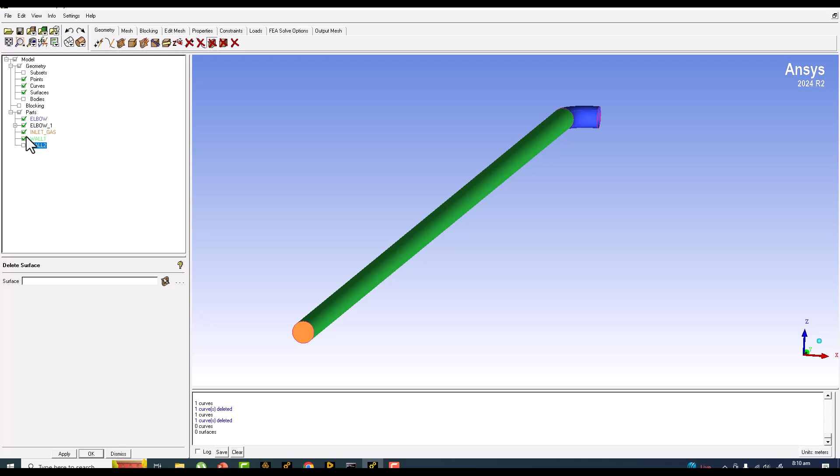We have made these parts: wall 1, wall 2 and the elbow, and also the inlet. In a similar way we should make another boundary condition, the outlet. Right click here and make it the outlet. Outlet is combined. I will tell you one more thing, that we have two inlets, and those are like air and water. I will explain that shortly.

So we have this elbow, and these are the extra circles that I required for some purpose, which I will explain shortly. So first of all, this meshing contains two parts: first is the preparation of geometry, and second is the actual blocking.

So the requirement is that if you take a look here, if I make 2 points on the circle, that is from points and parameters. So make one point here.

Let me show you one thing. First thing is that I made the center of the curve. Let me delete these points altogether. This thing will be very helpful to you. So first I made the center. You can make the center of any arc or circle.

Before I go further, the next thing is that I need to make the inlet for the gas. So first a diameter here: 0.2031, let me use the calculator... 0.2032. The requirement is that the diameter of the gas inlet should be around 35 to 40%.

So multiply with 0.35, and similarly 0.2032 multiplied with 0.4, 40%, gives 0.08. So I actually went with 0.076. Its half value would be 0.076 divided by 2, so the radius would be equal to 0.038.

So I'm going to move these points by the same distance. We have the translation tool, the transformation tool, where we also have the option of translation. So I will copy the point.

So for this point selection toolbar, I think we have disabled the point selection, so I will enable and disable the selection for surfaces and bodies. Okay, select the point, and here we have the two axes, we will move them in x and then in z. So in x it's 0.038, apply, and in z, 0.038.

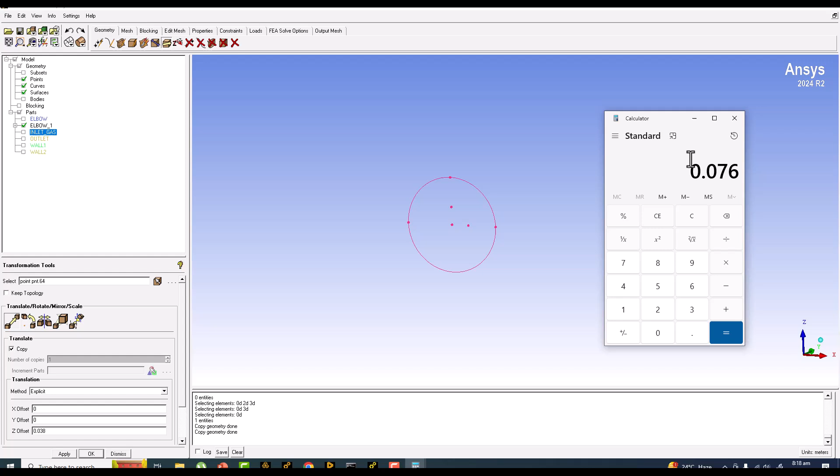Alright, so now we have the diameter equal to 0.076. Okay, so now we are going to make one circle from these 3 points.

The next thing is that I am going to make one center point at the 50% location. It's already there. Let's make it 0.25, 0.25, 0.25, 0.75, 0.75. Okay, now I am going to split the curve.

I will adopt this strategy for all the curves, because this will help me adjust the blocking very nicely. So I am going to split these curves one by one at these points, then the outer curve on all these 4 points.

So what will happen is we will now get 4 curves that you can check from the delete curve option. Don't delete it, just select - you can select 1/4 of the curve. This means we have divided or split the curve into 4 parts. But to uncheck, you have to press the right mouse button.

The right mouse button will help you uncheck, and you are not going to delete that curve. So select with the left button and then unselect with the right mouse button. That's all. So we have these 4 curves, and similarly here as well.

The next thing is I'm going to make another set of points at the 50% location - here, here, here, and here. Similarly for the outer curve, and now I'm going to delete the points there. These points I won't be needing for holding my blocking - they were only there to help us get these points.

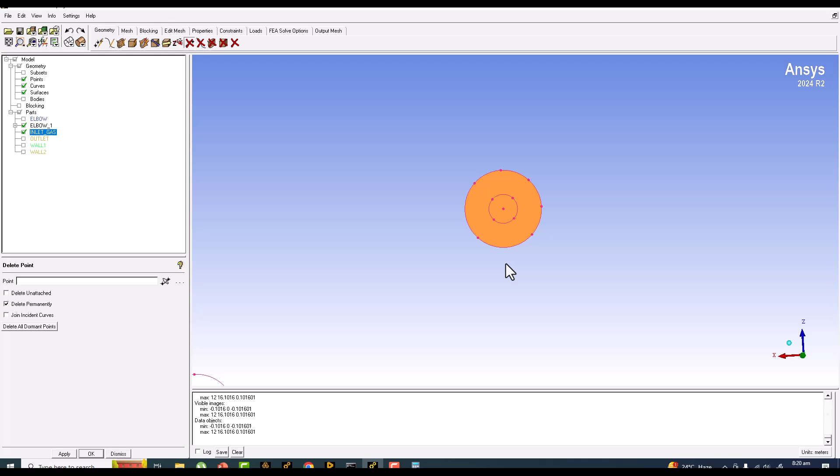Okay, we don't need the point here and here. So all of them are at the middle of each curve, right? So they are at 45 degrees - 45 degrees, then plus 90 degrees, plus 90 degrees, plus 90 degrees. So they are starting from the horizontal axis. The first point is at 45 degrees. Okay, so this is done.

The next set of points we will be creating here. One more thing - if I can copy these points, let me delete the points here, and I'm going to copy all these points. I will actually project them. So the point is we have the option 'project points to curve' - this is the curve, and these are the points.

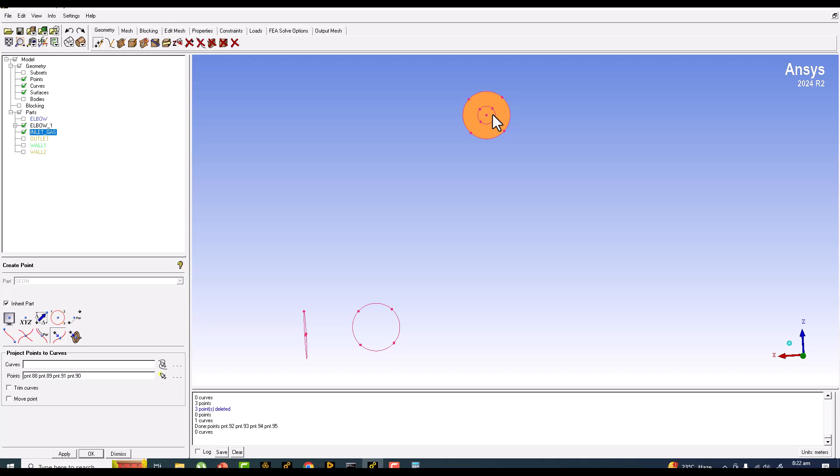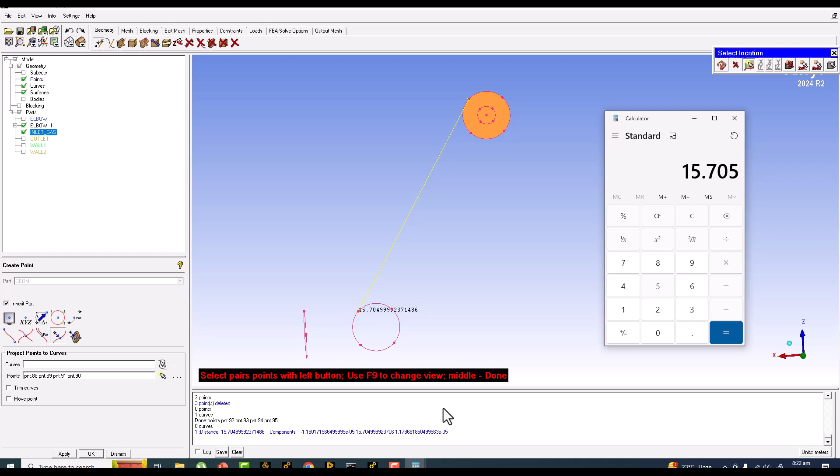But the only issue is we don't have the second curve over here, so we need to find a solution. The solution is first find the distance from the 2 points, and this is equal to 15.704 - 15.705. Okay, I would suggest we make the one curve by ourselves.

So I'm going to make a center point, and I will move that point by a distance of 0.038. This time it's going to be in the same x and z direction. So keep the z direction, put z as 0 and put x offset as 0.038 meters, and make one circle.

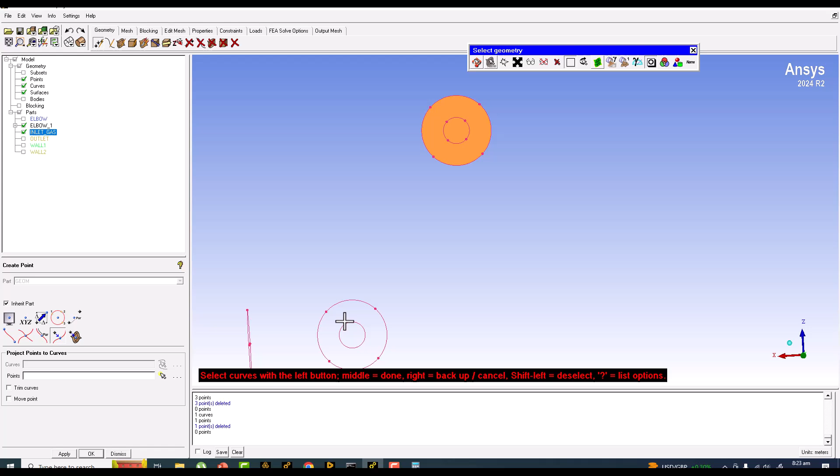Okay, I'm going to delete these points, and project the points again on the new curve, but from the previous point set, which is here. I'm going to delete the center point here. Now project these 4 points - so the curve is here, and the points are here.

Okay, so we got all these 4 points. Again, I will be doing that on this portion here. First let me deal with the first circle. So I'm going to create the points at different locations, 0.75 as well. Now make the split here.

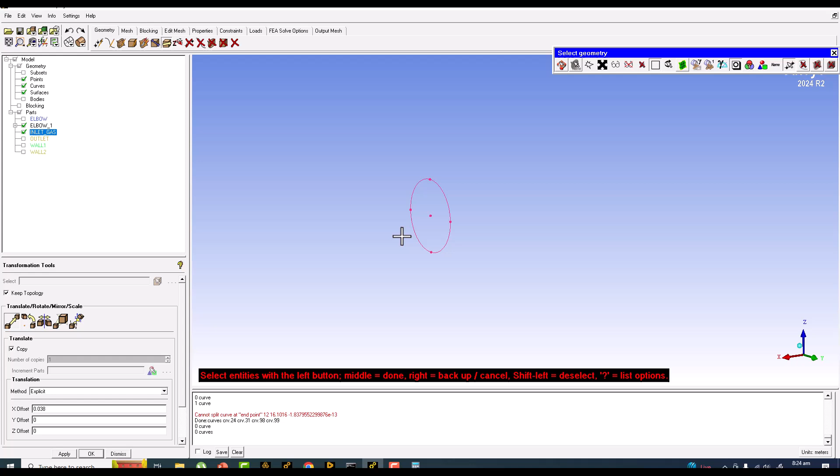So I'm going to split the curve. It's showing that we are able to split the curve. So now I'm going to move the points here, but this time in the y and z direction. I want to move it by 0.038 in y first, and then in z. Now make one circle again.

Similarly we need to make the points on this curve as well. Now split the curve on these points - segment curve, so we are talking about the second curve now, on these points. Okay, delete all these points, and now you have to make the middle location of each and every curve.

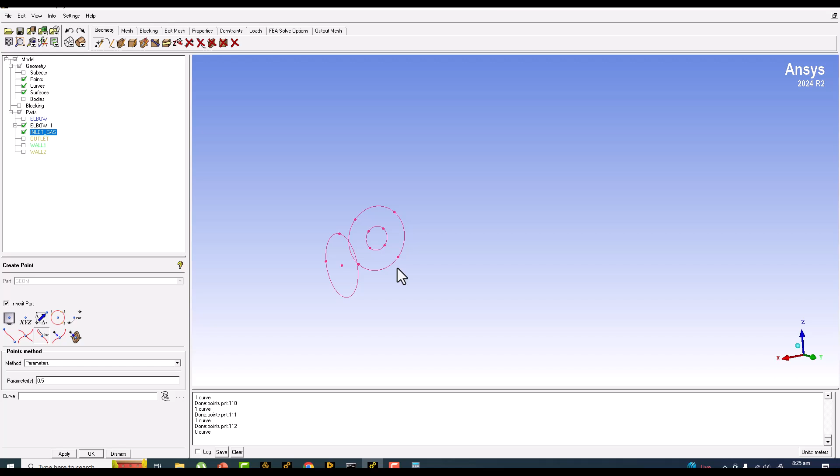Okay, delete these 2 points, and we will keep the center point because we need that one to move the point by the same distance, so that we can make a small circle there. So one point, and then the second point at the y. Okay, make one circle here also.

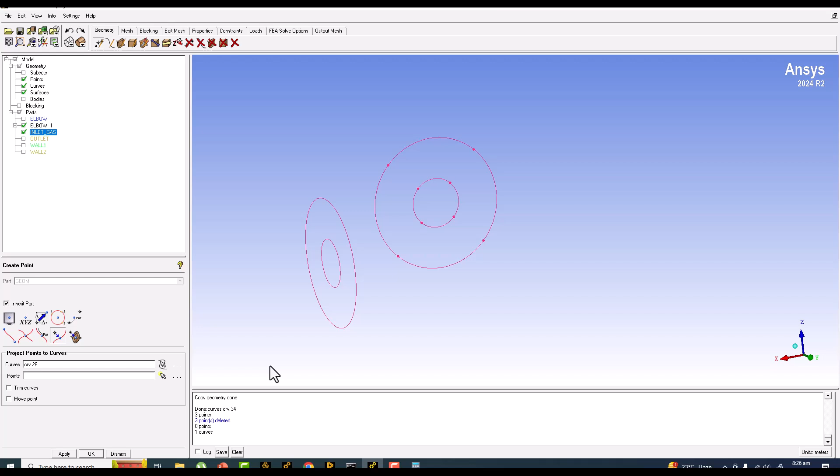Okay, so I'm going to delete all these points here, and I will now project the points from the curve. Okay, so select the curve, and the points are here.

Okay, now select the internal curve, which is here, and we will move to the selection of the points. And save your project as well. So now we have all these points with us.

Okay, the next thing is that I am going to display the surfaces. We already displayed surfaces on the actual inlet. We need to make the two surfaces here, but not a requirement for the outlet.

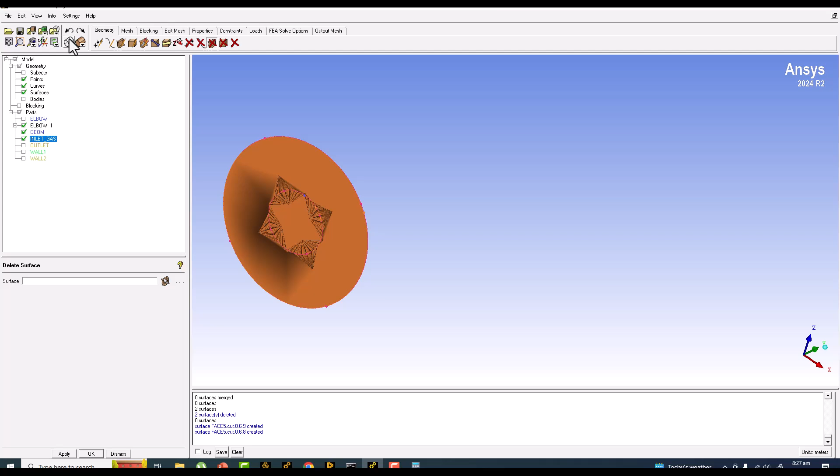So I am going to split the surface in two parts by the segment surface. Select surface and then select the corresponding curve or curves. Okay, sometimes this may cause a problem, so the solution would be that I will undo.

So I'm going to delete this surface altogether, and I'm going to make a surface from these curves. Okay, so we have the two different surfaces here.

So I'm going to put different names here. One is the inlet gas. Selection should be selected for the surfaces. So it's the inlet gas, and the second one is the inlet for the liquid.

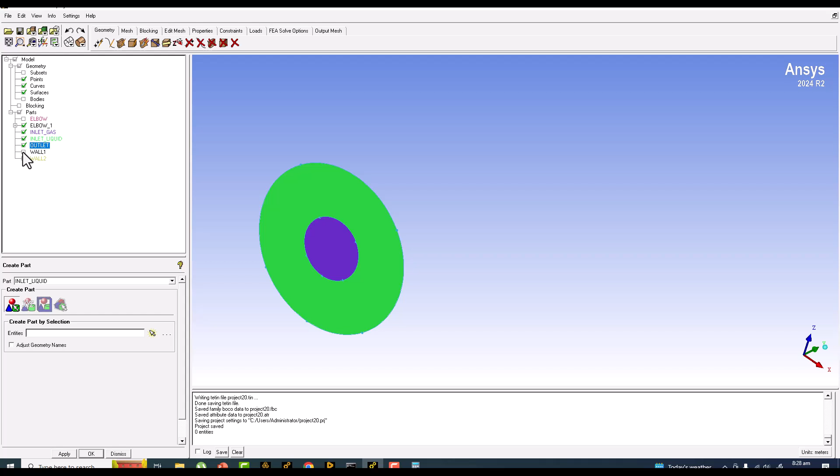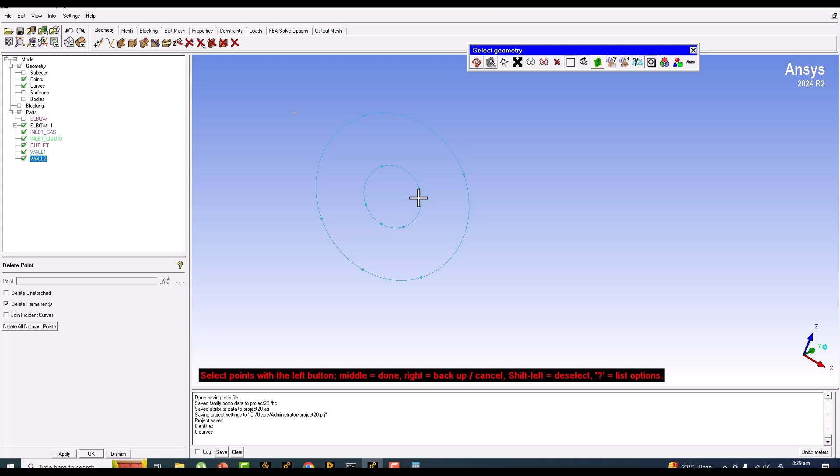Somehow the points are disturbed here, so let me delete the points from here. Okay, I think the surface making should have been done in the very beginning. Okay, anyhow, not a problem.

So what I'm going to do is that I'm going to copy the points on these curves. Okay, so here I'm going to select the project points. So first the internal curve.

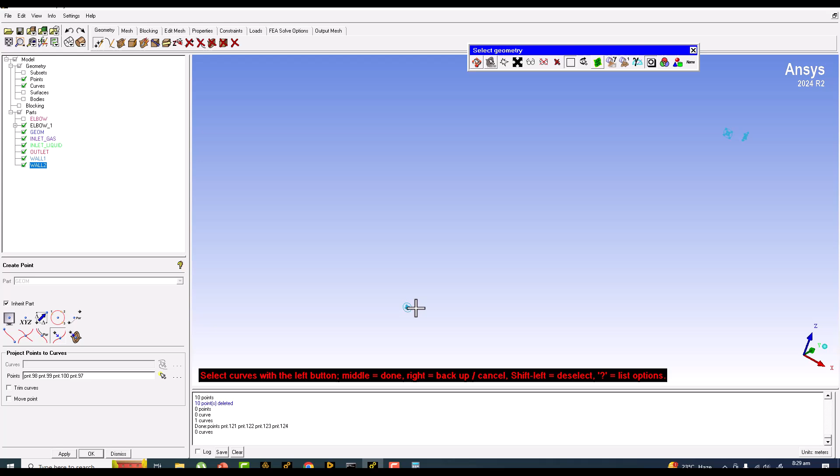Okay, so they are at the perfect location. Second one is that we are going to select the second curve and the second set of the points.

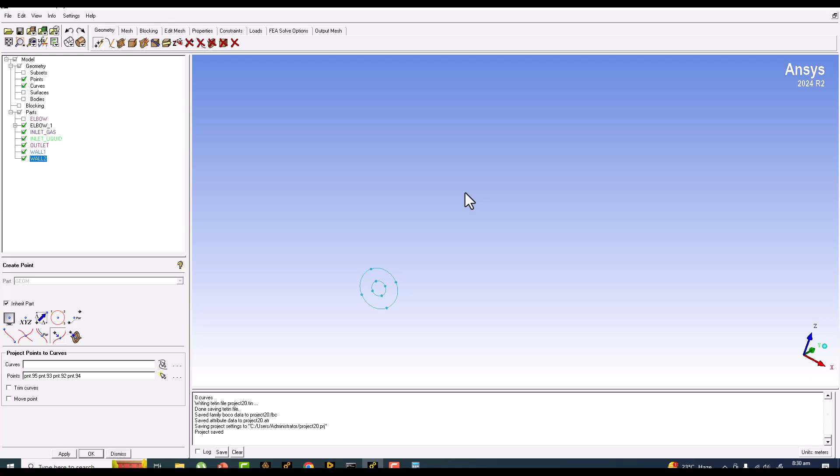Okay, now we are done with our adjustment to the geometry. Now start with the blocking. So 3D blocking, bounding box.

Okay, right click here and choose the good colors. Okay, I want to make another part that will contain the points. So PTS, short form for the points. So I will be selecting only points, nothing else. So uncheck the points and select all the points through here.

Okay. Second part is for the curves, and I will select all the curves here. Okay, so right click here and click on the good colors and save everything here.

Try to delete this surface because this part does not contain anything at all. I think no, nothing is there. You can save it. Okay.

Okay, now we have to adjust the blocking on these surfaces. Okay, so for adjustment, I will use the association tool. Definitely the association tool is needed to associate our blocking to the geometry. Otherwise, the mesh will not project on the geometry, because the mesh in ICEM CFD we make on the blocking.

And everything we do on the blocking, but to connect the mesh on the geometry, because the ultimate goal is to make the mesh on the geometry. So for that we use association. Association means that we project the meshing from the blocking to the geometry. That's why the blocking is used.

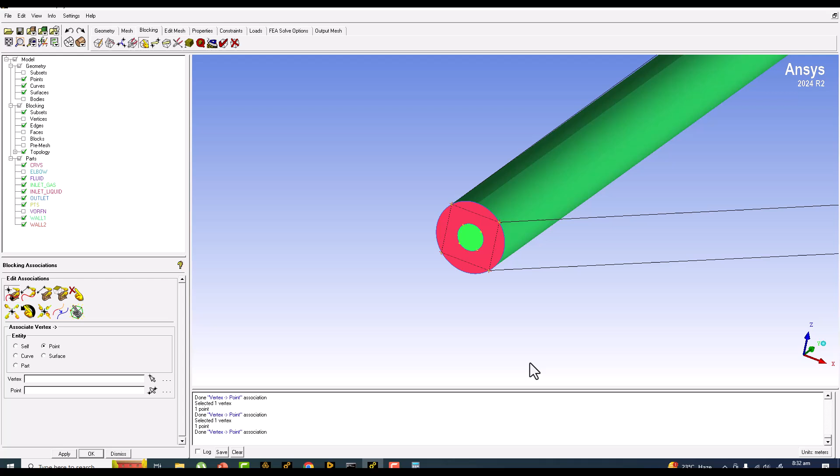Okay. Now go there and just check that they are at the proper points. Okay, so we are done with here.

Now definitely this line will go in this way. This line will go in this way. Will go in this way, right? So I'm going to make two splits here before I go further. So I'm going to make one split here for this location, and one split here for this location.

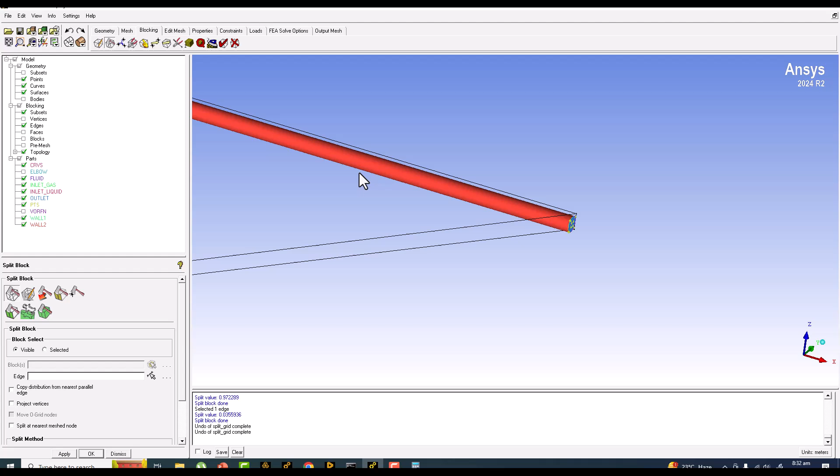Okay, the only thing I'm worried is that this may make you confused. So undo, simply undo. Now just be careful what I'm going to do here.

So you can see this line will be moving on the internal side of the surfaces, and they will end up at these points. So I will associate these two vertices, these two over here, and those two should go on this side, on the upper side. I'm going to select the first upper one and this point, then the bottom one and this point.

Now this will make you more confused, but don't get confused. I'm now going to make the two splits here.

First, the first split. So I will just move this blocking close to these points. For that I will use the move vertices command, with multiple vertices, and I will select them all together.

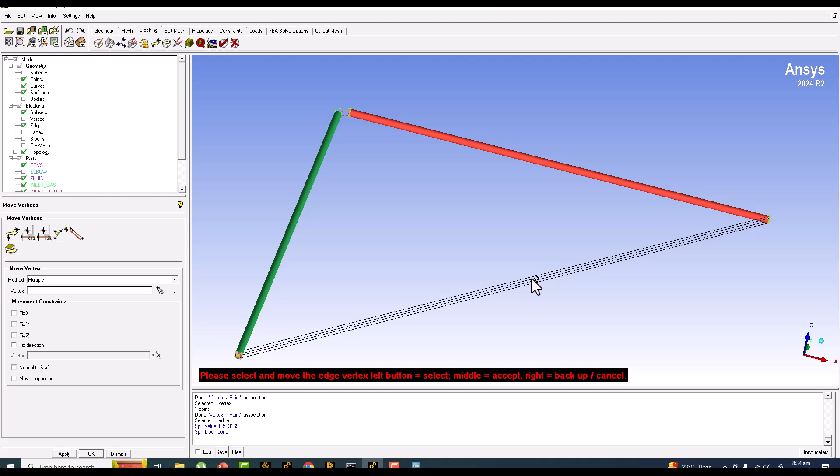So we have selected these vertices. Now let's move them here. The issue is that they are actually associated to the corresponding surfaces, so they will not move.

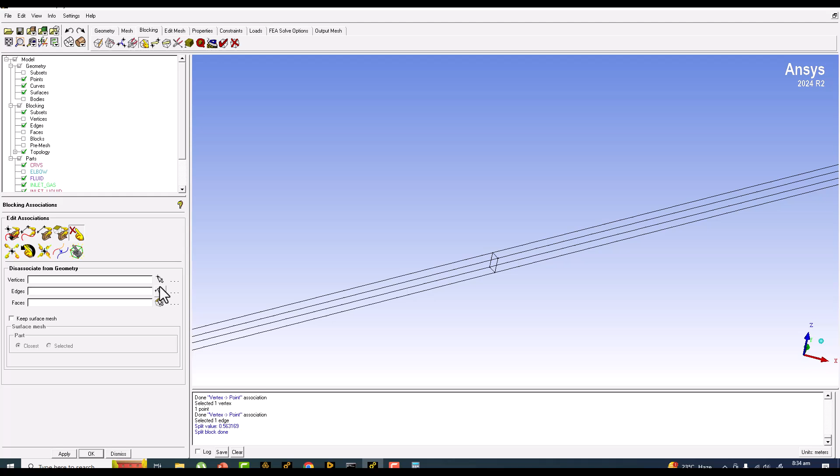Again use the move vertices command and select all these vertices and move them all together here. Still not.

Okay, the next method, maybe we can hide the surface, then we can be able to move them. So select. Okay, no, we are not able to.

So I will now use the association tool. This vertex should go on this point, this vertex should go on this point.

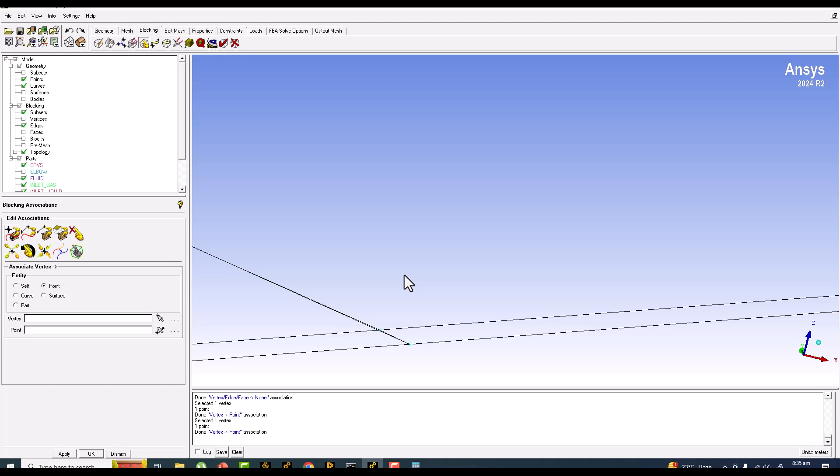Now be careful, and this vertex will go on this point here. The last vertex will go to the other point.

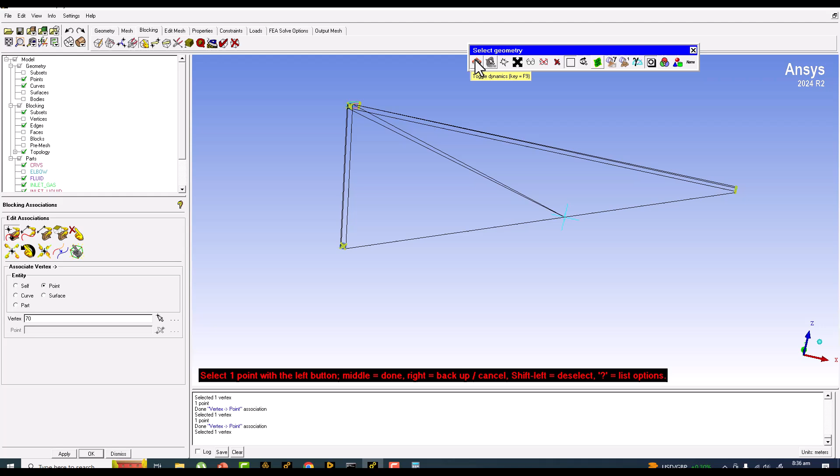So I'm using the selection toolbar, toggling to the dynamic mode, which means now we can move the geometry, we can move it on screen. First it was in selection mode, and now again it's in the simple dynamic mode or the movement mode.

So we adjusted the view of the geometry, and then I will go back to the selection mode and select the point. So we adjusted the blocking here.

And save your project. Okay, make another split here. Definitely this is going to get you confused again, but don't get confused, just follow this line. This line is here.

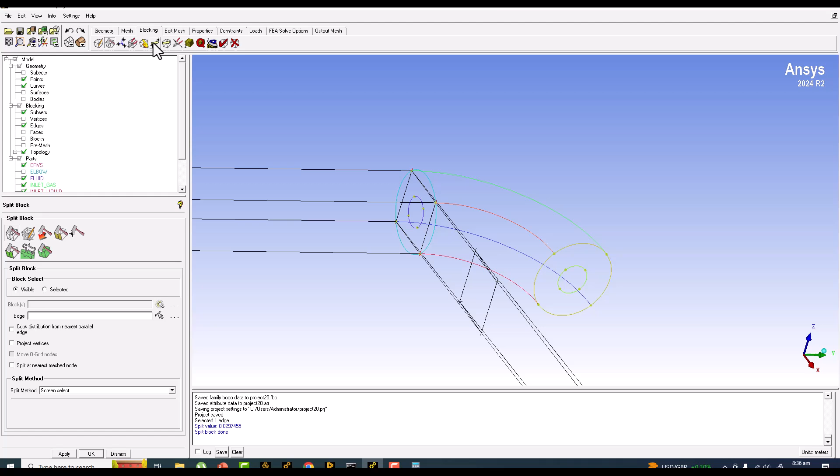Okay, so try one thing, that they should go to the proper location. Definitely from this point, this curve, this edge should go on this point, and similarly this should go here. Now the bottom one should go here, but just check this, the outermost should go on the outermost side, and similarly innermost should go to the innermost side.

Okay, so we have adjusted the blocking here very nicely. One more thing, if you are looking at the curves here, these curves were not there. So let me delete them and show you again how I made them. Okay, so we have surfaces for the elbow as well.

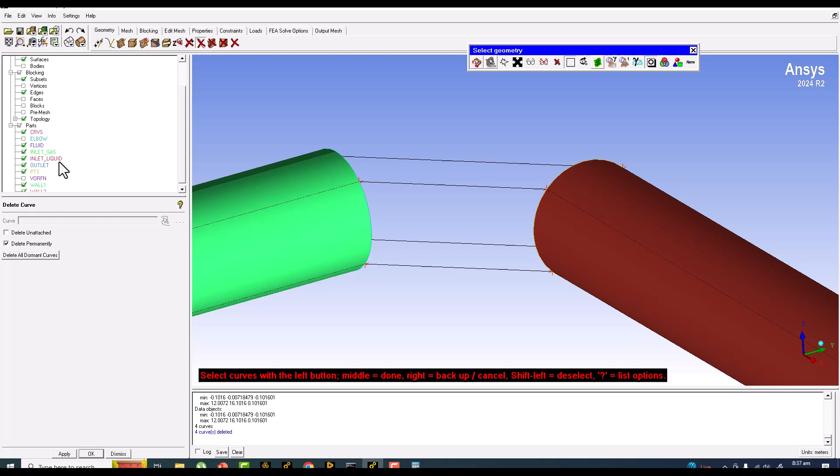Now the problem is that if I make the mesh, if I go to blocking, because I adjusted the blocking, a few associations are remaining for the curve to the edges, so that I am going to make here. Then I will tackle the problem of the elbow section, which is a very important part in this meshing.

So first let me associate. We made something wrong here. We made them part of the two curves, but this should go to the curve here, over here.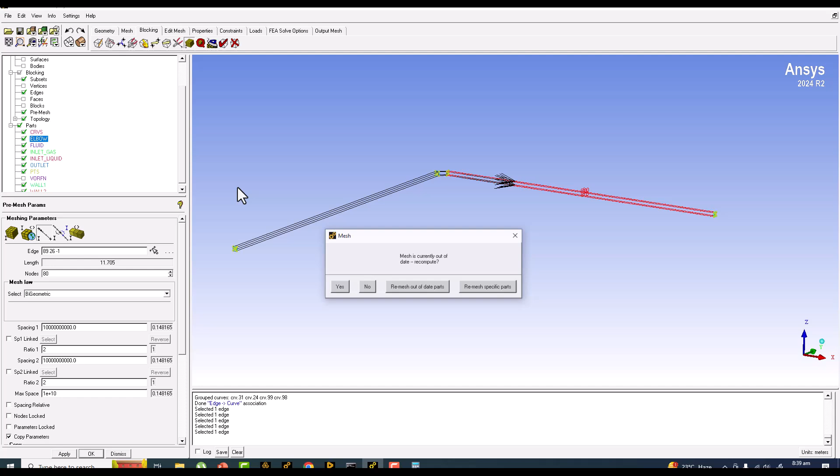Okay, so let's try with the first pre-mesh. Let's check what we are getting here. Also need to put the points here, so let's make them maybe 30 cells here.

So you can see the problem here.

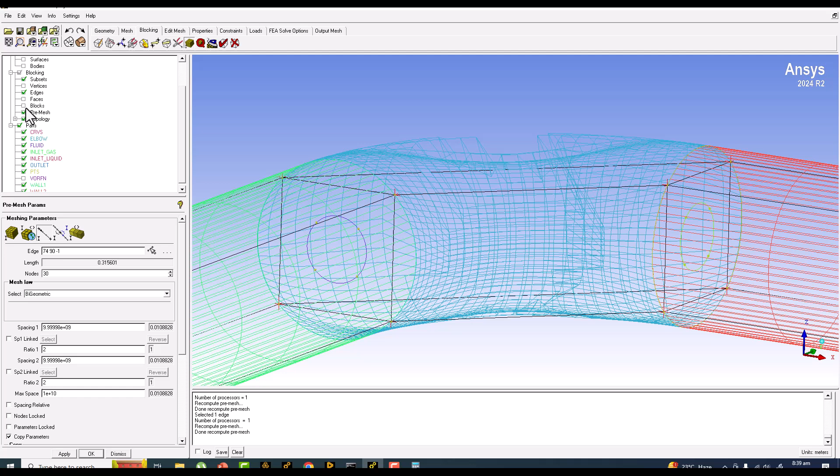The first step is that we have to associate to the corresponding geometry. I will display surfaces but in wireframe form, and I'm going to associate these faces. These faces are on the curvature, so they may get confused. I'm going to associate them from a screen selection, making sure not to select curves, only surfaces. And that is the elbow, right?

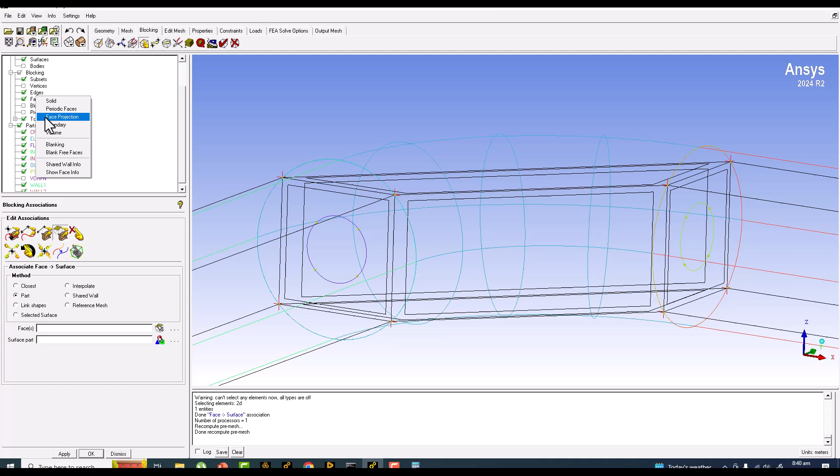Click on accept, and now check your pre-mesh. It's the same problems. How can you check that we have associated faces to the surfaces? For that you select the faces, right click, and select face projection. This clearly shows, because other faces not showing that they are projected.

They are automatically projected, but we didn't force them to project. These are forcefully projected on the surfaces here, so this is showing you by this procedure. Right click on the faces and face projection will indicate this thing.

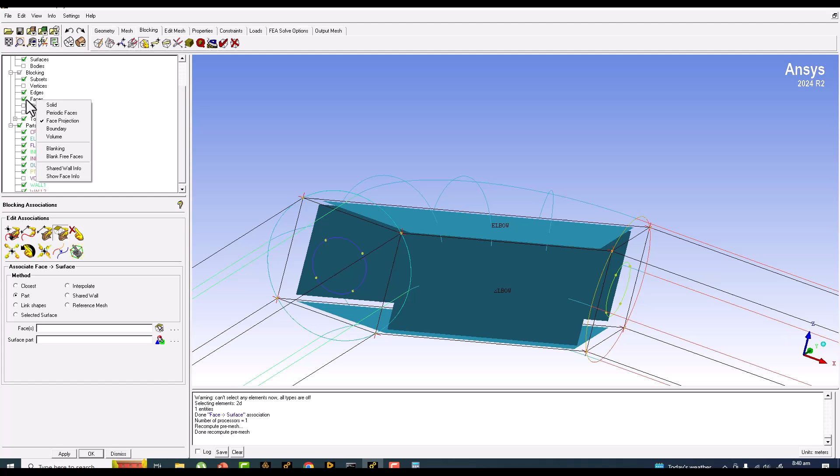But the solution is that we have to associate, we have to curve. These edges should follow the curvature, but they are straight lines. The problem is that if you adjust them through the method of splines, they will adjust, but not very exactly.

So the procedure here is that I am going to create the curves. I will use ISO surface, and I will be making them because these were selected at 45 degrees. At 90 degrees the location is 25%.

At 180 degrees the location is 50%. At 270 degrees location is 75%, and again at 360 degrees, 100% location, zero location. So this location at 45 degrees means half of 0.25, which would be equal to 0.125.

So I'm going to make one curve at 0.125. That curve has been created here, exactly where we have the corresponding edge.

The second curve will be at a distance, so I will add 0.25 to 0.125 and get 0.375. So 0.375, and one curve here.

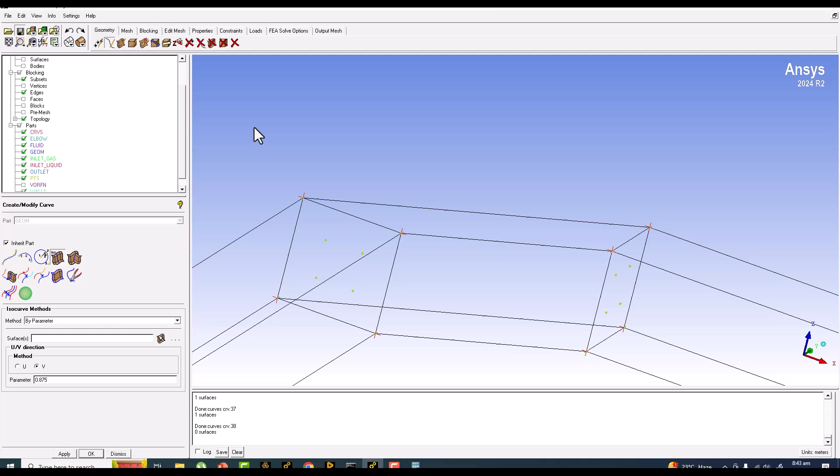Now you can hide the surfaces and save your project file. So we have these curves here. Now simply associate your edge to the corresponding curve. Simple.

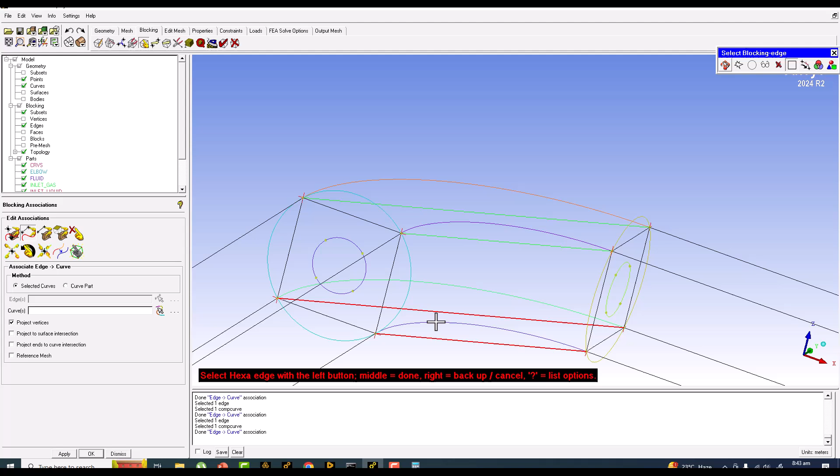Now I will use a spline tool. I will just click once and this will go to the corresponding curve very quickly. Now I'm going to make midpoints on these curves - I will explain why.

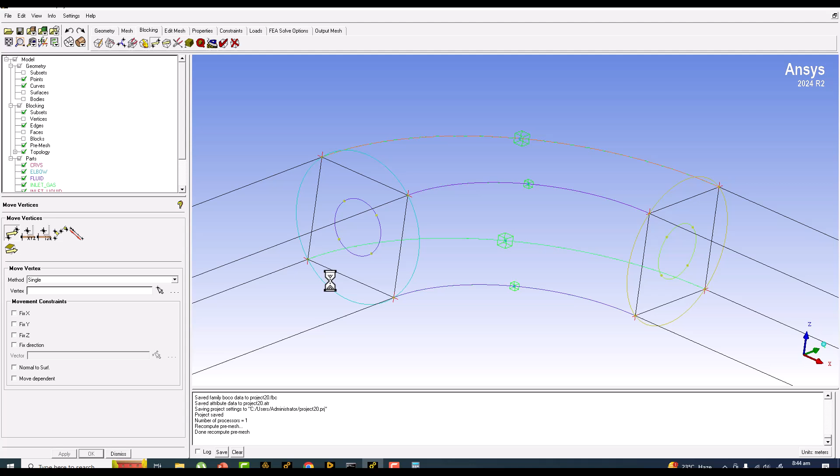Go to the move vertices command and move these to the middle locations. These will adjust your edges here - they should move to the middle location of the curve, just for the neatness of our blocking, not exactly but close to it. Now you can check the pre-mesh, and this pre-mesh will be exactly on the curvature like this. So this problem is solved.

Now we need to tackle, not exactly a problem, but definitely we have to tackle the second inlet, and then we have to tackle the low quality elements here. All these things will be done through the O-grid, so I will go to split blocking and select all the blocks here.

O-grid, select blocks - select all the blocks. So all three blocks are selected.

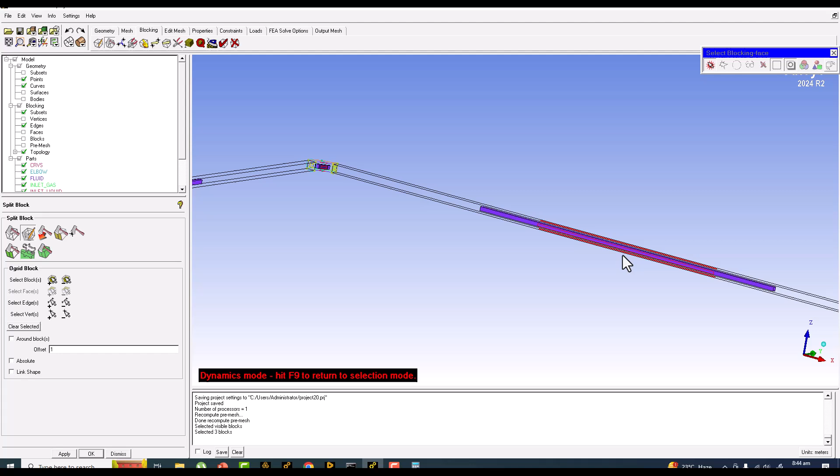Now I will select the end faces on the two sides, inlet and outlet. You can toggle to dynamic mode, then move the geometry to the required location, then click on this arrow and you will again be in selection mode. Select the face here and click on apply.

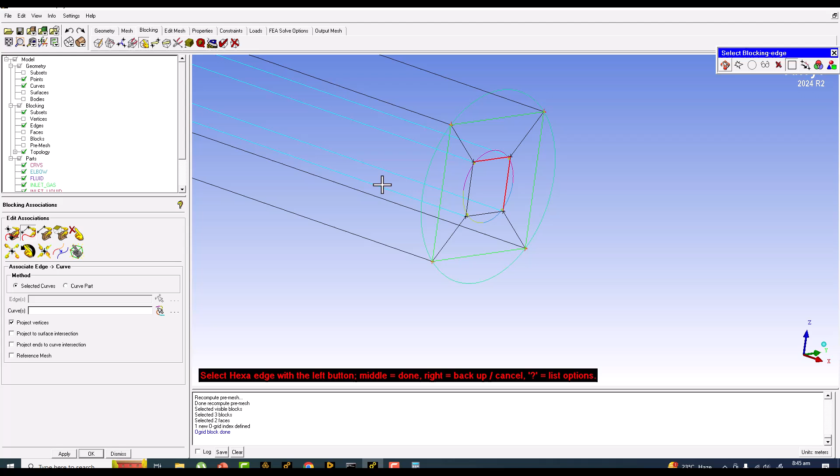Now we have these curves here, so I will associate them, select the project vertices option also, and select all these curves. They should go to the corresponding curves automatically, projecting them there. If not, then I would be associating the points and vertices.

So finally fine tune our blocking. We need to use the point vertex to point association very often. Although I selected the option to move them to the required location, sometimes it didn't.

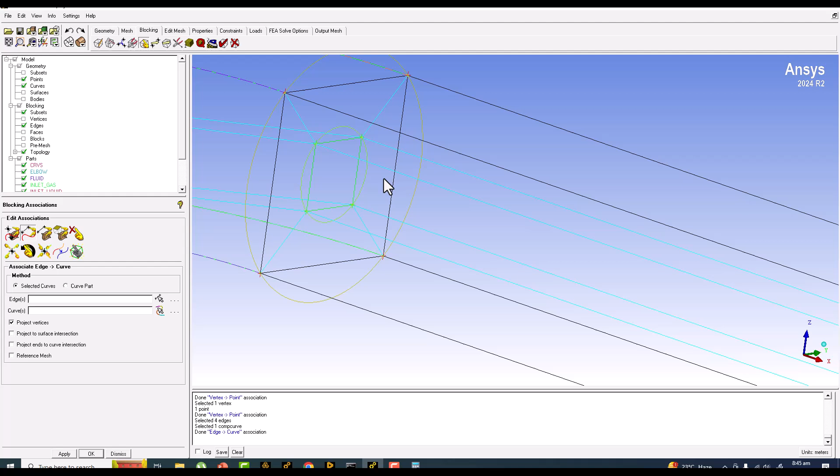Sometimes this happens. Now select all these four edges and this curve. They went to the curve very nicely, but we still need to maybe adjust the vertices, here as well. No, we have to select only these four curves, edges, and this circle.

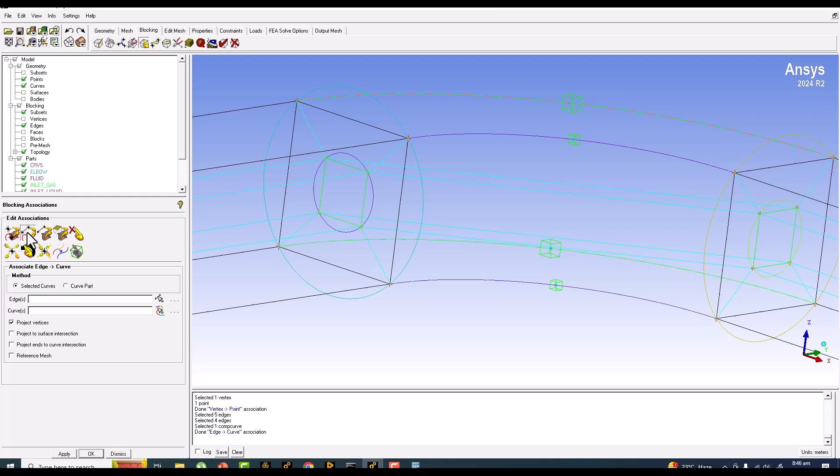Okay, now again check the pre-mesh.

Now low quality elements are here, and also we need to associate these four edges to the curve, because it started from the outlet section. That's why we didn't pay attention here on the inlet as well.

I think I made the mistake of associating the wrong edge here. That was selected. So now select the four edges and the curve figure. Again, the same thing, like a vertex to point association. That's very important.

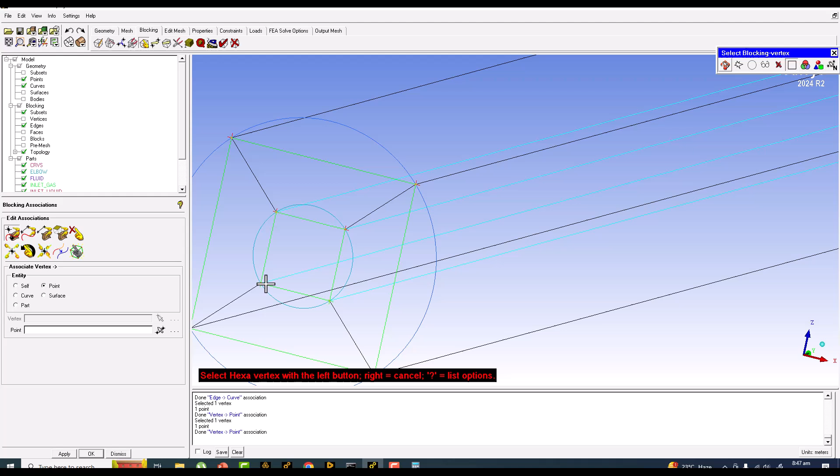Now I will be putting the number of cells here. Let's put the number of cells at 30 or maybe 40. First cell height is 0.002, so let me make it 0.005. Ratio is 1.1. Second spacing also 0.005, ratio is 1.1, and apply.

Check the pre-mesh, and make sure that the copy parameters option is enabled. Apply and check the pre-mesh again. And save your file also.

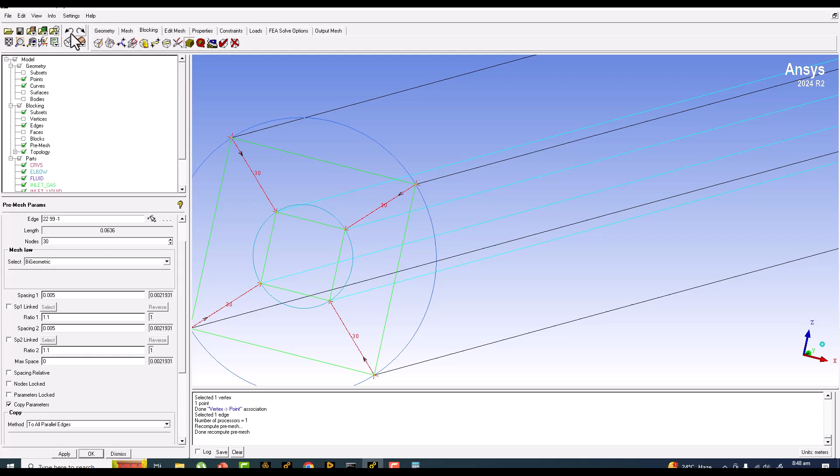So now we have done the meshing here, but I think this meshing does not look very good. So let's make one more zero there and more cells here, maybe 40. Apply and check the pre-mesh.

Now this looks better, but the quality at this location is not good. But before I take care of the quality through the O-grid method, I'm going to tell you that...

We actually have to adjust the blocking edges here. So I have the option - we know we have the edit edge option. We made the edges spline, but that spline was made because they were part of some curve, so they adjusted to that curve and projected to it. But now internal edges in the center, they are not part of any curve. They will not go anywhere if you make them spline as well, because they are internal edges. Let me show you that it's not going to affect them in any way.

They will still be straight lines, so undo the splines.

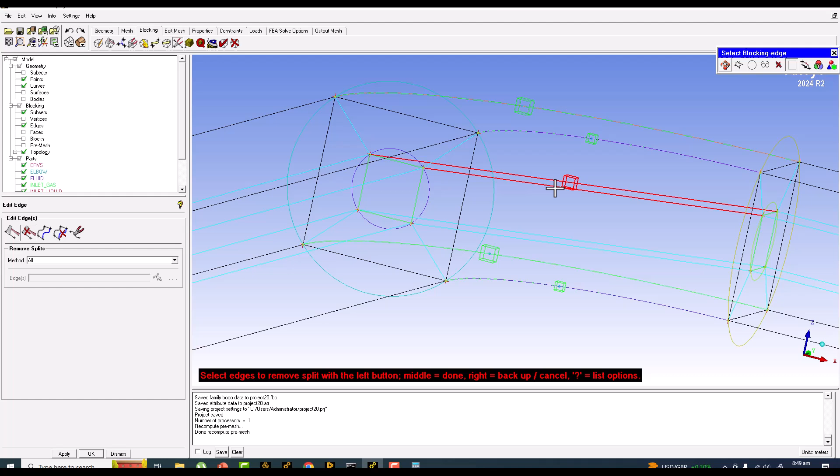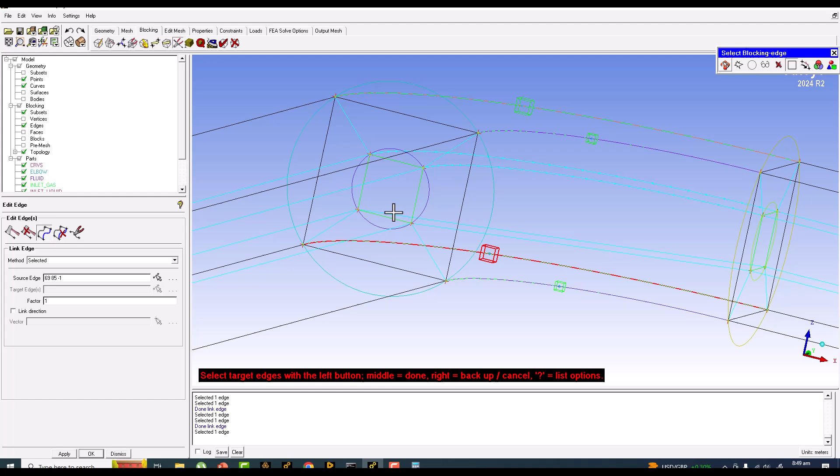There's an option called link edges, so I am going to use a factor of 1. You can also link the direction as well, but I'm not required right now. So I will use this edge for this corresponding one on the same diagonal. This edge here, this edge, and again the diagonal edge is this one, and this edge here, this edge, and this edge.

So we adjusted them very nicely on the internal side as well. You can use the factor up to 3. Zero means no effect will be there, and if you add more and more factor here, this adds more curvature, but that curvature should follow the required curvature of the geometry, not more than that.

It's like salt - the salt you should be putting in your food as per your taste. So same here. If you put in more, it's going to give you more curvature, but this is not required - it's more curvature than our geometry needs. So undo. One factor is okay, maybe you can try 0.9 or 1.1 as per your requirements.

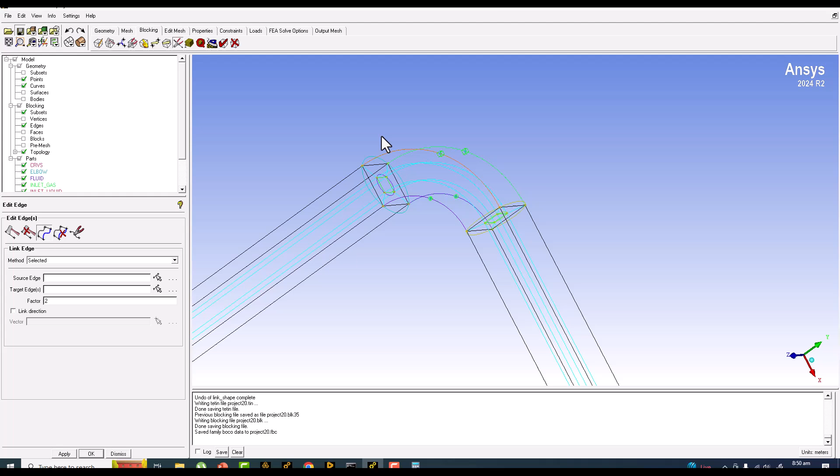Now we are heading towards the last O-grid, and also we need to associate it to the face, so that we can get the boundary condition for that particular face here. Very important - I will tell you that step at the very end of the tutorial.

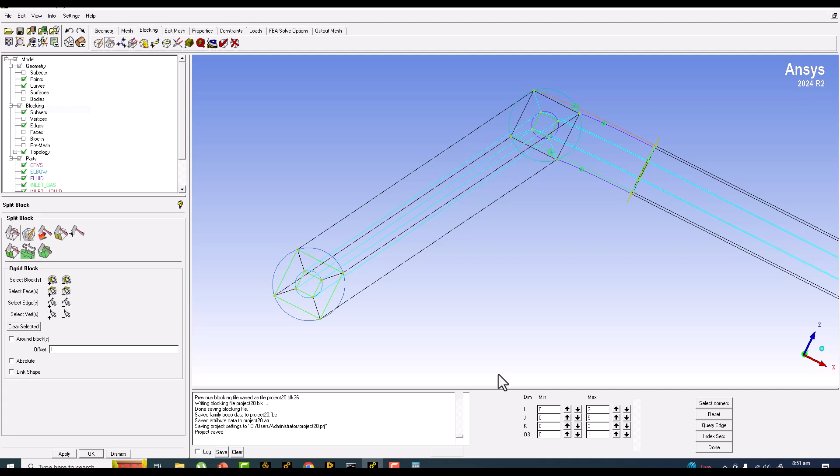So the next thing is that I'm going to make another O-grid, and before that, right click on the blocking and adjust your blocking visibility, so that I want to display only the internal blocks here. I'm going to select all these blocks together, and also select the faces on the inlet and on the outlet, and click apply.

Okay, so first let me define the number of cells, but before that I want to use a command called match edges. This will match the spacing on the two sides across the two blocks. I will select one edge here, one edge here. Actually it has copied the spacing which was 0.0005, so I am going to put that spacing there. Spacing is copied, so let's put the ratio as 1.05 and the number of cells equal to 20, apply, and right click on the pre-mesh and click recompute.

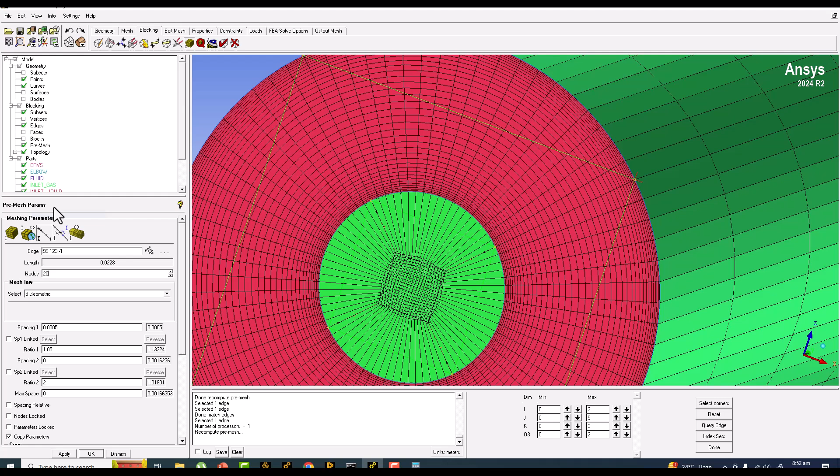If I hide the edges, you can see this block is very small. I think this length diagonal should be adjusted, so I'm going to adjust the length. We have the rescale option in the edit block, and I will move this location, reducing the length by 0.75, meaning the length will now remain 75% of whatever length is here. If it was 1 meter, this will now become 0.75. Apply and check.

The benefit is that it's not only going to make the adjustment there, but it will adjust all the edges on the blocking. Otherwise I could have used the move vertices command, or the set edge length command, but I would need to do it for all the edges manually - 4 edges here, 4 edges on the second side, 4 more edges, so 12 edges total. This way I adjusted the blocking for all the blocks across the complete geometry.

So this looks better, this looks better. Okay, now I need to associate my blocking to the corresponding geometry here.

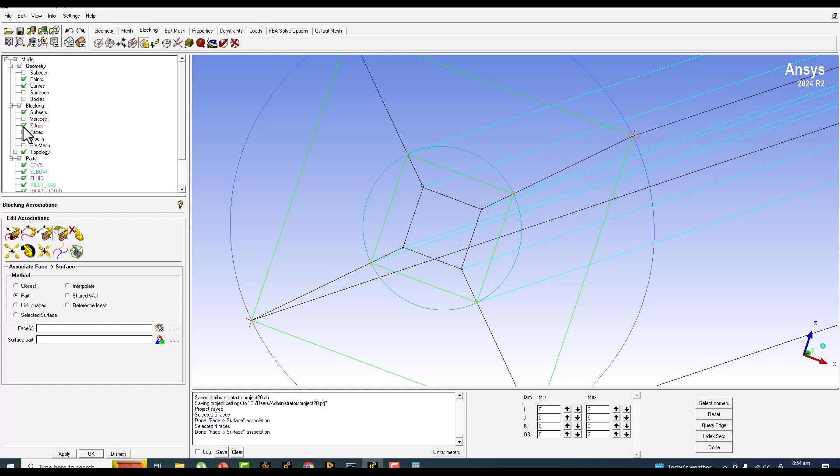The first thing I will associate these 5 faces to the gas inlet - gas inlet is here, inlet gas. Similarly I am going to associate these 4 faces to the inlet of the liquid. Now check the pre-mesh and you will see the different colors. They were also already there, but sometimes we have to force them so that the boundary condition should be correctly exported to the CFD solver. For example, in this case I am going to use Fluent.

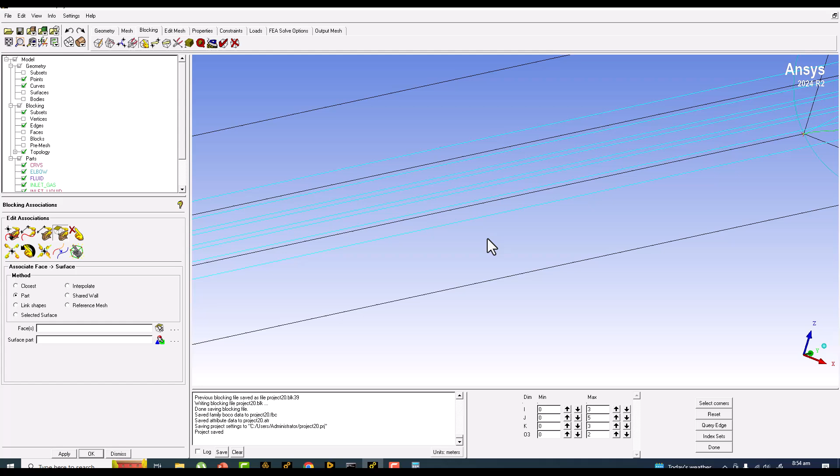Now I need to adjust my blocking on the elbow section. Again the same command, we need to adjust the blocking here. This time I will use this edge which we adjusted previously as a reference one, and this will adjust the shape of the corresponding edge on the same diagonal. Factor 2 was selected and it should be 1.

For this edge the corresponding edge is here. For this reference edge the corresponding reference edge is here. For this one, this is the corresponding edge. Okay, save, and I think we are done now.

So you can check the pre-mesh, check the quality - it's around 0.75, I guess 0.737. Second quality check, it should be more than 0.3, so it's way above that. Second thing is angle should not be less than 18 degrees - here the angle is even way above the minimum requirement, that's 45 degrees, 45 degrees. Okay, so hide all these things.

One more thing is that I need to adjust my face mesh size change across these blocks. Hide the pre-mesh, and again I use the match edges command and I will copy the spacing from here to here, and from here to here as well.

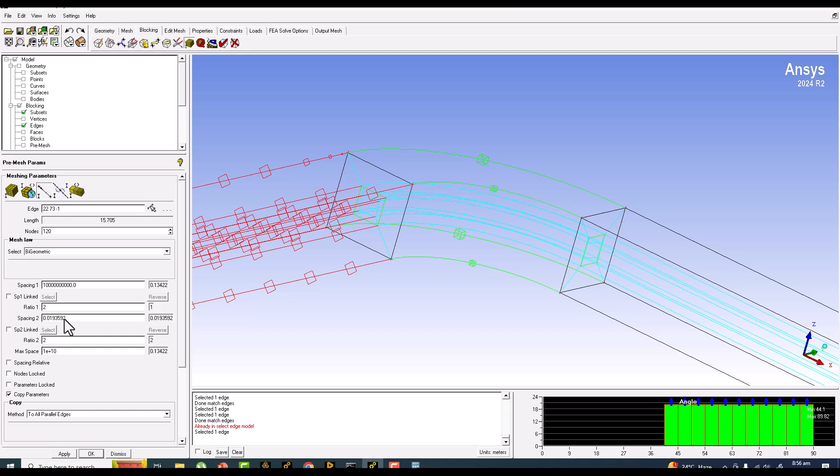Now I'm going to use these edges where I put the sizing, and I will copy my sizing from this edge to the corresponding parallel edges - that's why the copy parameter option should be enabled. I'm going to put the ratio here, you can see this was done here, spacing 2. I'm going to put a very minor ratio of 1.05 and apply. Similarly here, again the ratio, this time this was done on spacing 1, ratio 1.05, apply and check the pre-mesh.

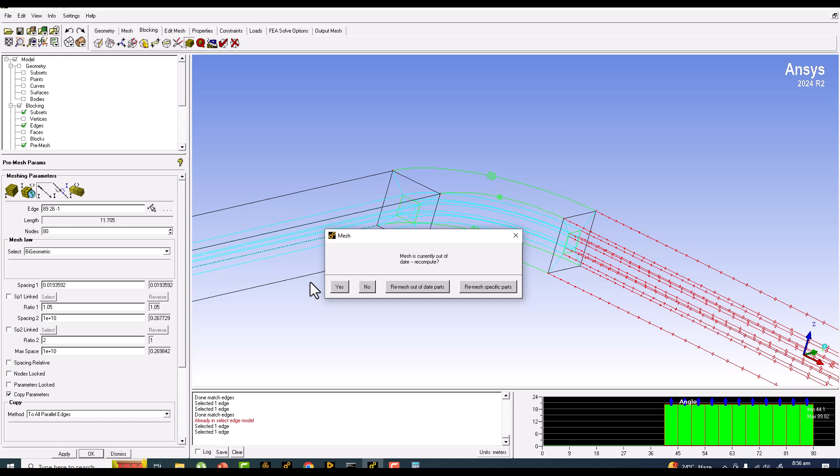Save the project file, and now you can see that the blocking has been adjusted and the mesh is now uniform across the block. There's no sudden change in the meshing across the blocks.

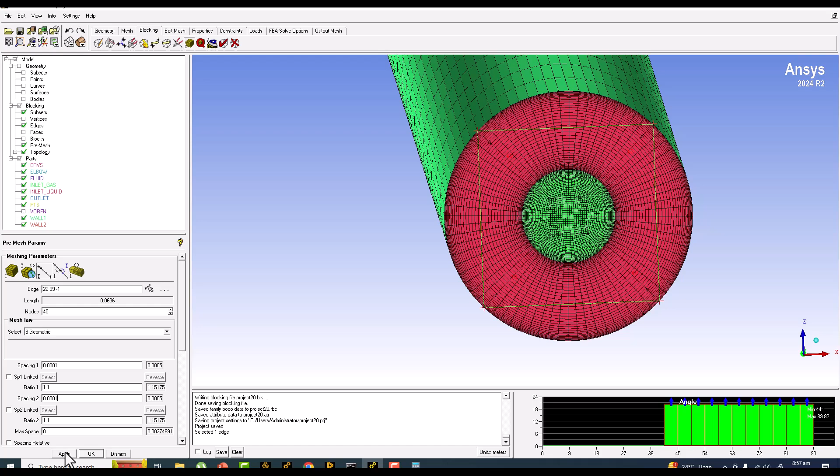Now I want to check the mesh from inside, so I'm going to make a scan plane. Right click, but before that I think I should adjust the meshing slightly here. I'm going to make it 0.0001. Right click here and check the pre-mesh. Let's make it 0.2.

And again copy the parameters from here, apply and check pre-mesh.

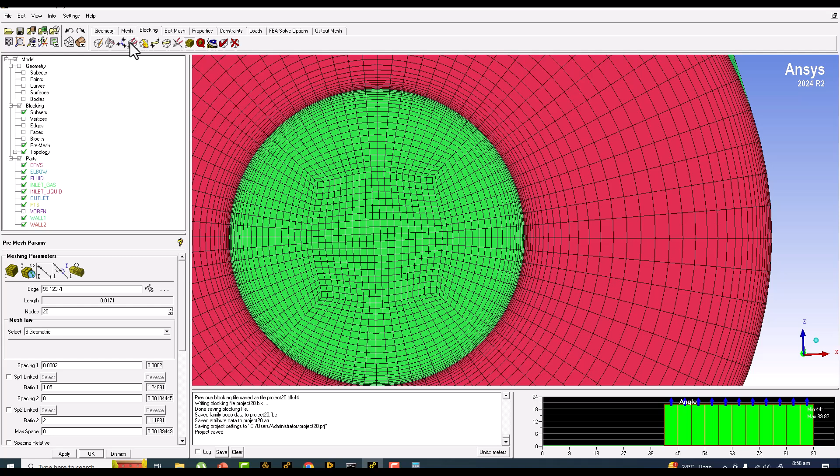I am thinking to adjust my blocking slightly here, so I am going to increase the size by 10%. For that I will put the factor as 1.1. Okay, this looks better. Angle is still the same or not? It's 44.828, and the quality is equal to 0.75. It has increased slightly.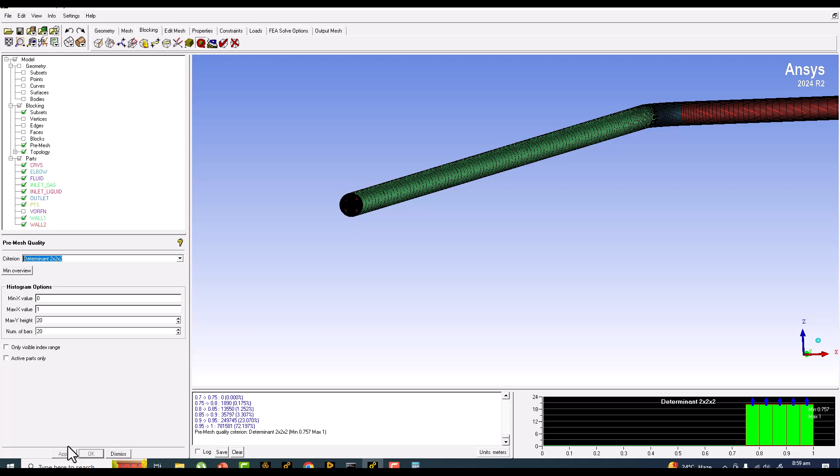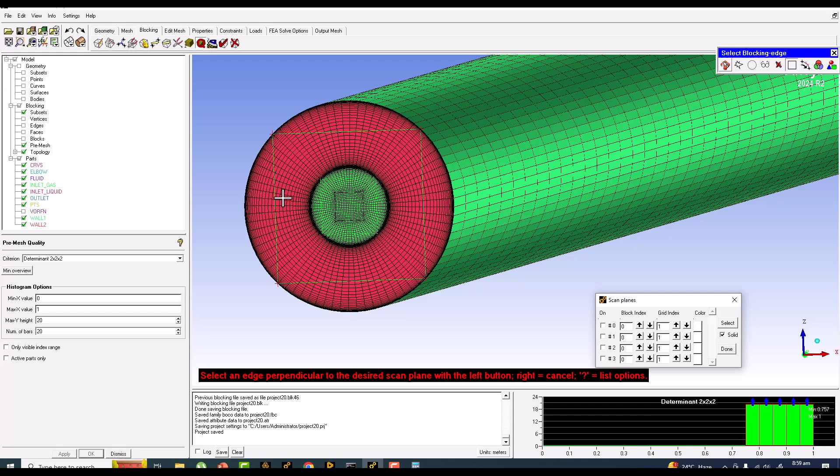Now let me put the scan plane. The scan planes are the planes that will show you the mesh from inside. You will exactly see how the mesh is behaving, because from the outside we can check it, but not how it looks internally. So maybe you can find the problem from there, from internally looking at the mesh.

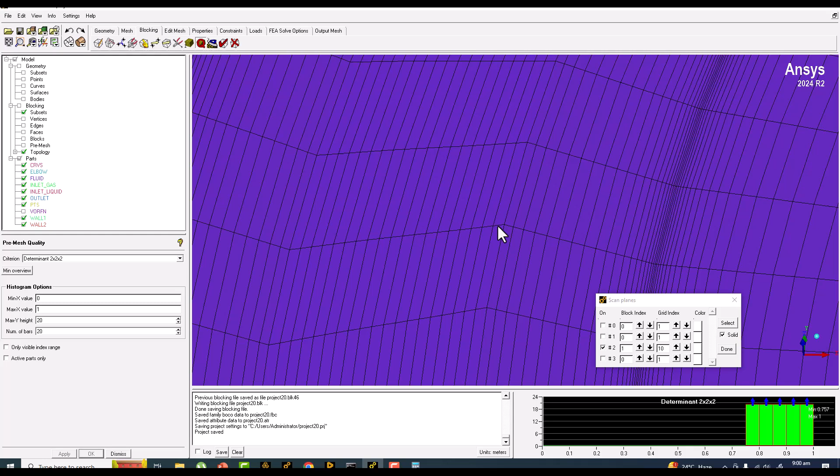So now we have the scan plane put there, so you can check the mesh from inside. You can see this is actually based on the angles here. It's trying to make the 90 degrees. If I make the straight line, this will disturb the angle. This is done automatically, trying to make the angle orthogonal as much as possible, so don't change it. Second scan plane I can put maybe here.

You can change the color of your scan planes. From the internal view, I think the blocking looks good.

Now we save the project and just remove the scan planes, and check the pre-mesh. Now we have to export the pre-mesh to the meshing format required for export. From the pre-mesh, I am going to convert this to an unstructured mesh that will be used for export to commercial CFD software.

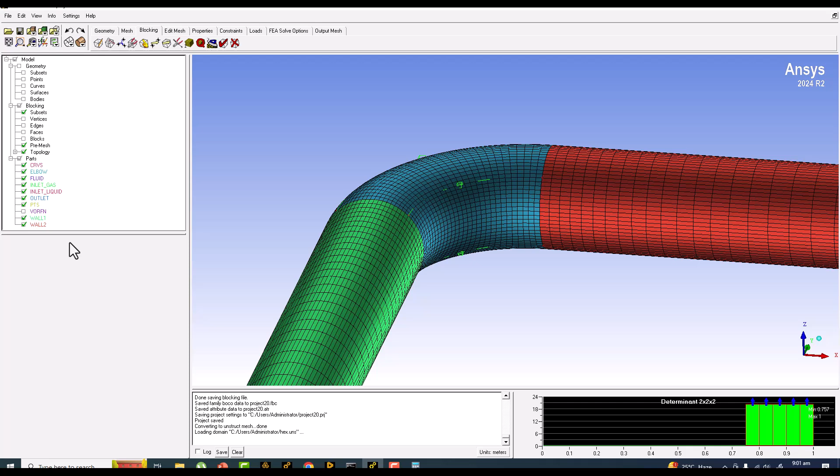Now I'm going to set my boundary conditions here, in the output mesh. I will be selecting solver, which is Fluent. So boundary conditions are important here. In the volumes, I will put this as the fluid. In surfaces, one-sided surfaces are inlet. Inlet is going to be the velocity inlet.

Copy this one and put the same boundary condition type in the inlet liquid as well. Outlet is, usually speaking, a pressure outlet. Wall is the wall.

So copy that one, second wall, paste that second boundary condition. You can see the white color, and there should be the elbow boundary condition. That elbow is going to be the wall condition as well. You can see the white color here, it is now selected. So we have selected all the boundary conditions.

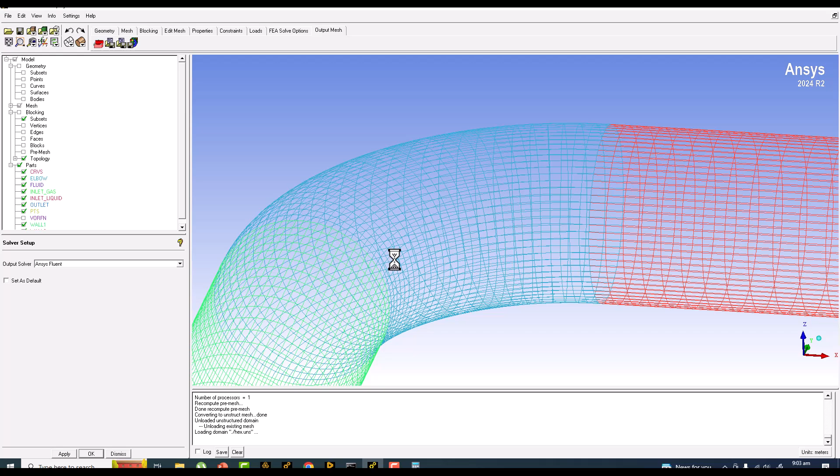Okay, you can save your project file. Now you have to output the mesh. Let's once again recompute the mesh and convert it to an unstructured mesh. Now export the mesh because the boundary condition is already set there.

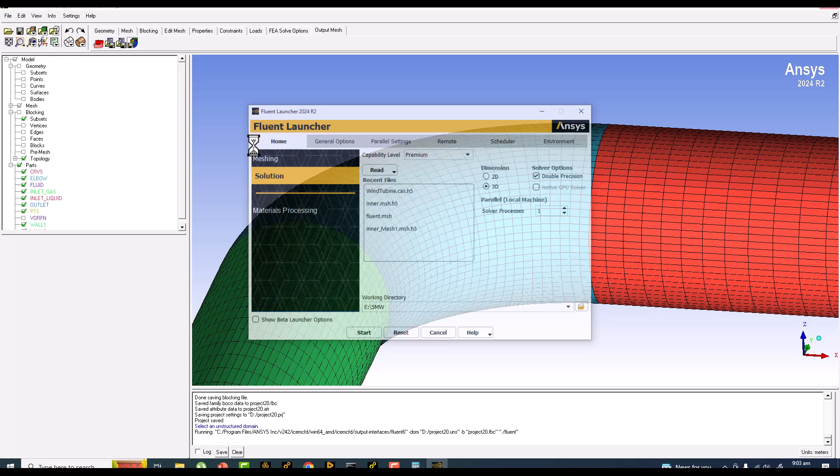Okay, open Fluent. You can read directly the mesh file from your screen here. That mesh file is in the D drive, fluent.msh, and make the number of processors 4. I have 4 cores actually in my computer, this is the maximum I have, and click on start.

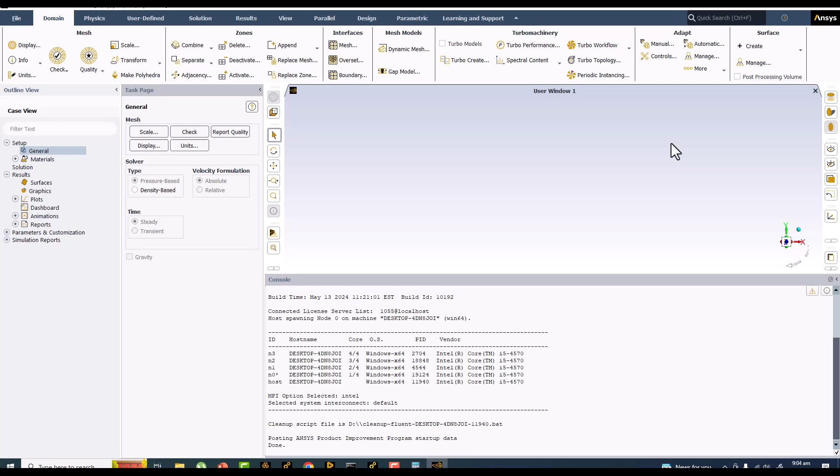Double precision should not have been selected for this case, but anyhow it was by default, and I didn't notice until after I clicked start, so I could have unchecked it. My suggestion would be that for these simple cases, don't use double precision unless it's required by the particular physical model, like volume of fluid or multi-phase simulation. Otherwise, don't use it.

Here, why am I putting it inside the fluid? I just want to check the mesh inside the fluid. So the number of nodes is around 1 million.

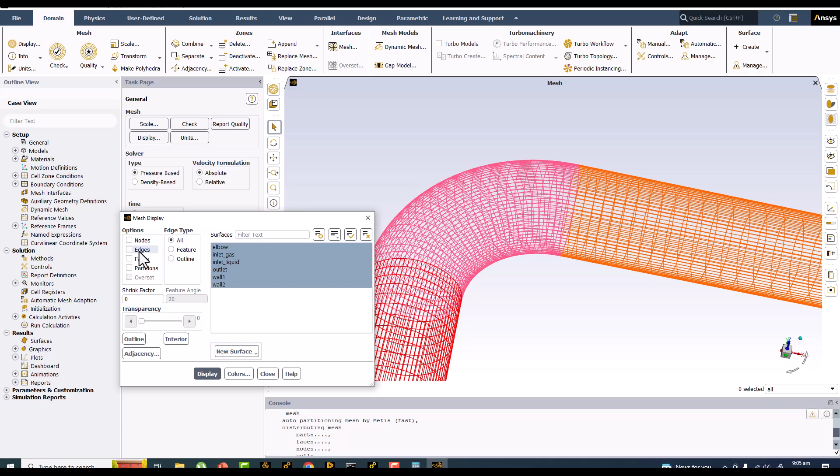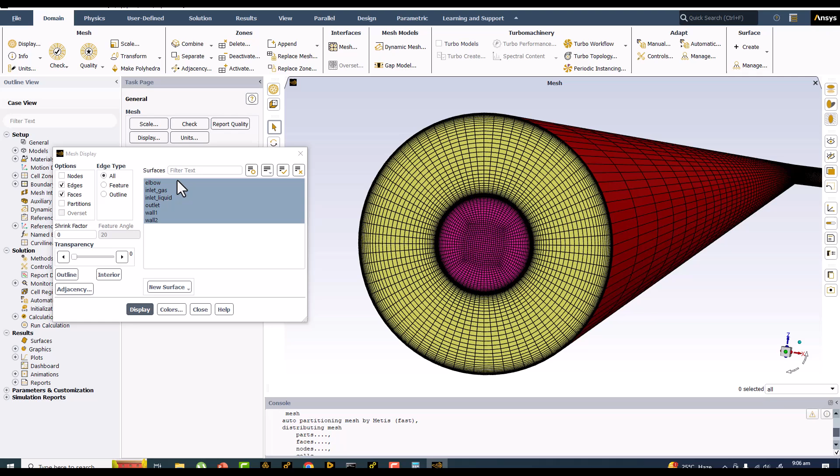Okay, you can change the colors to some random colors by surface IDs display. We can display only the mesh lines, or only the faces. Here you can hide the elbow, the wall one. Let's display the inlet gas. So here we have the elbow.

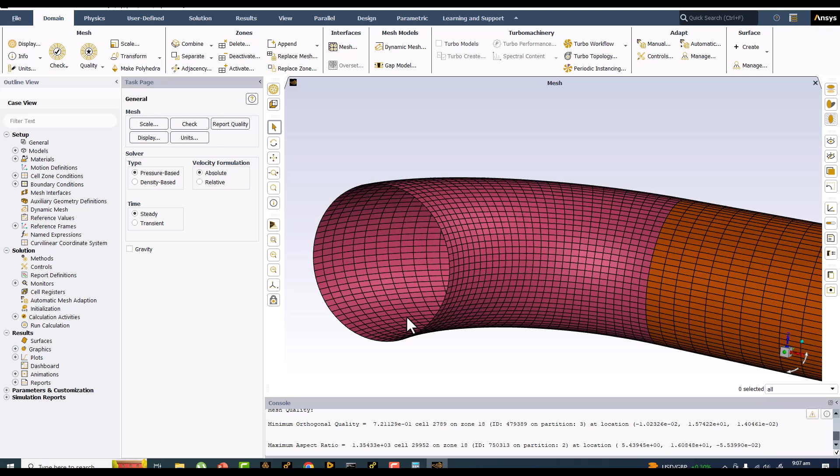We can check the report quality here, and its quality right now is 0.72, which is very high quality. I hope you have learned a lot about ICEM CFD Hexa meshing. I think I've almost covered the geometry manipulation for Hexa meshing and almost all the commands required for having very good quality Hexa meshing in ICEM CFD. Thank you very much.